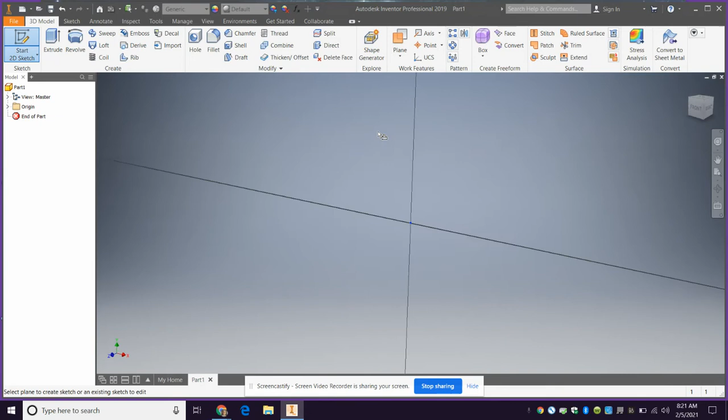All right, let's go. So first thing we want to do is start a sketch. Now, in the instructions, it says the maximum length should be 5 inches. So one of the first things you want to do is set a line that's 5 inches long.

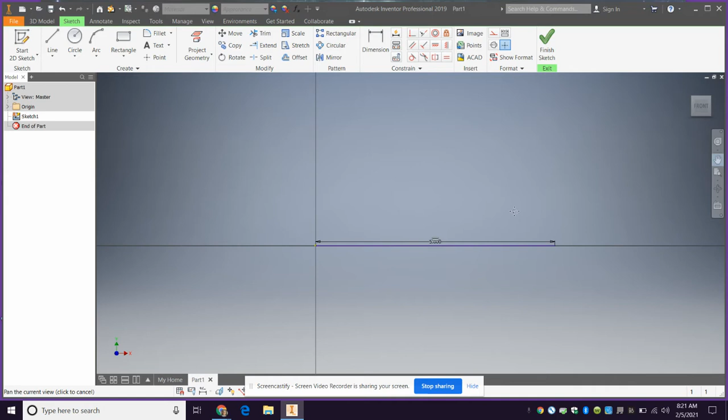All right, now zoom out a bit here so you can see what's going on. You've got to realize that when you do this, it's going to start with a revolve, and when you do it, it's going to end up doubling the thickness. So what we're going to do is sketch half of this lightsaber.

So it comes pretty, something's going on at the end here I can't quite see. Let me see if I can find a better side view. Episode 4, yeah okay, so this is the original one. I think Rey ends up with this one. And future... oh, that's a nice image. Okay, so it is pretty flat in the back.

No, that's Anakin. Can't seem to find a very good view. All right, so it looks like something's going on in the back, I can't quite see it very well. So anyway, I'll just continue with... oh, here we go with this view.

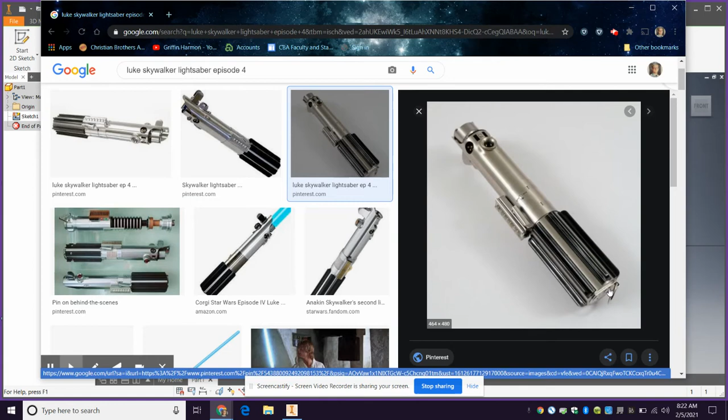Okay, so it's just a little thing to attach. All right, so it looks like it comes pretty straight, steps down a little bit, comes straight. So this is a fairly easy start to this one.

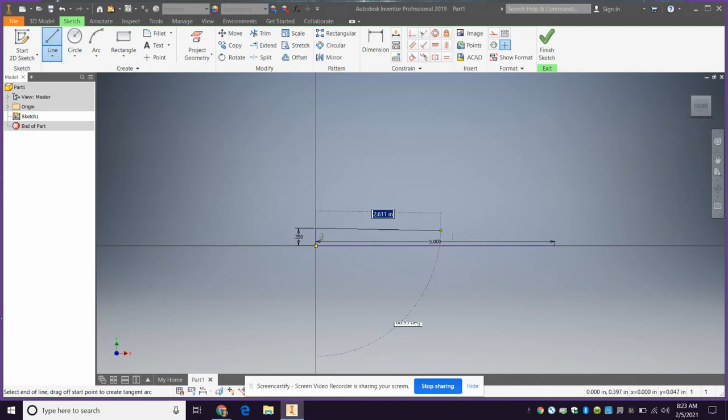So the total width of this thing is going to be maybe 3/4 of an inch. So let's make this 0.35. Comes forward, steps down a tiny bit, then comes to the front.

All right, now the step down, I will say you're going to have to maybe exaggerate some of that stuff a little bit, because if you don't, that difference in thickness won't actually print. So I think that actually looks like something that's just kind of around the middle. But oh well.

So let's go ahead and cut this front part off here. I guess we should shell it first, huh? Or revolve it, I should say. So actually, I want to make the front hollow, right? So let me show you how to do that.

Actually, going to draw, we'll say down to there. All right, let's dimension this. 0.08... 0.05 is probably better. Trim off this and this. Let's delete this dimension really quick, dimension here.

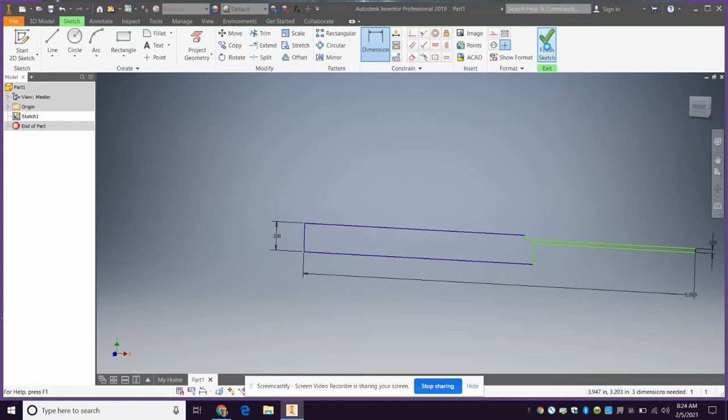All right, I'm going to revolve this. Finish sketch. Revolve this shape about this axis.

All right, okay, so I know that steps down quite a bit more than what it appears to in the actual part, and I don't know that I necessarily have the proportions right. This appears to be just about in the middle of the front edge of this. It actually looks like maybe I should step it down back here a little bit too, so I think I'll do that now as well.

All right, so let's go back to that revolution, the sketch. All right, I'm actually going to make this line step down here a bit as well. Oh, that's not what I want to do. So I'm actually going to change this up a little bit.

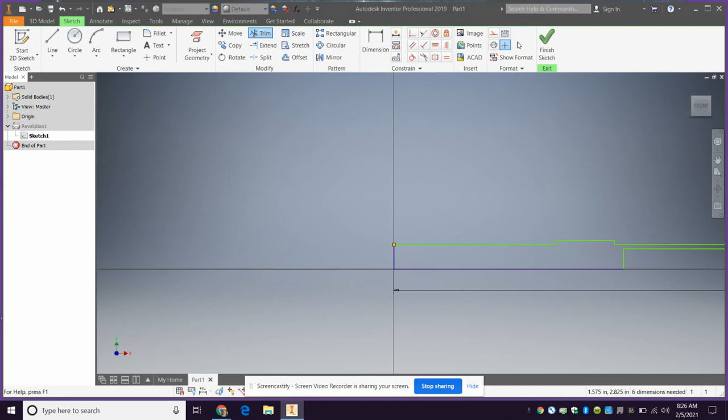And again, I'm just eyeballing the proportion right now. You could get a little more technical and bring the picture into the model and trace it, but this will do for our purposes here.

Sketch. All right, now one important thing you can see, the grip's going to go down here. I got to cut out the front here a bit, so I might have to move back a little bit. We'll see. So this front part, I got to cut this out, then I got to make this thing. That's probably one of the more important things to do right now.

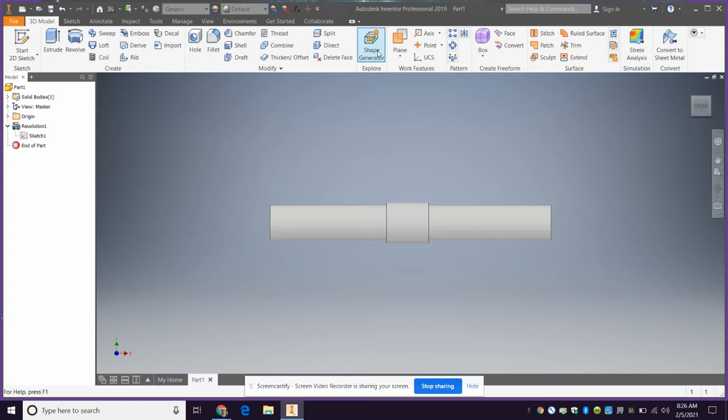So this is the important thing here. We got to make a plane, tangent to surface and parallel to plane. All right, and after I do this, I'll do the grip and then take a break.

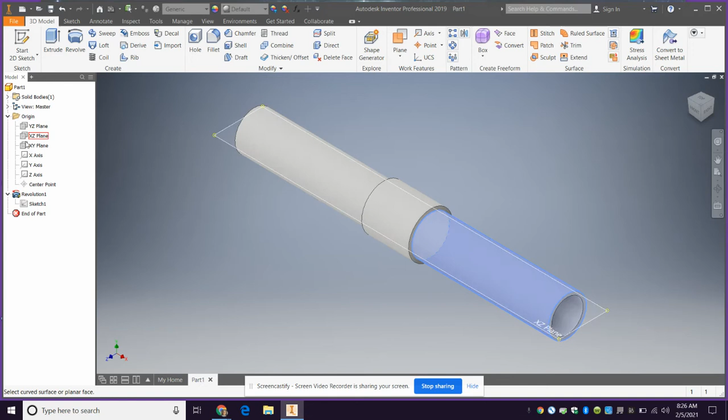So tangent to surface and parallel to plane. So we're going to make it tangent to this surface, and the plane we want to make it parallel to is going to be the plane that cuts right through the middle of the object. So unfortunately, it put it over on this side, which is okay. But see how it's blue? That's a problem. When we go to sketch on it, we want to be on this side to make that little scoop cut. But that's going to be unfortunate.

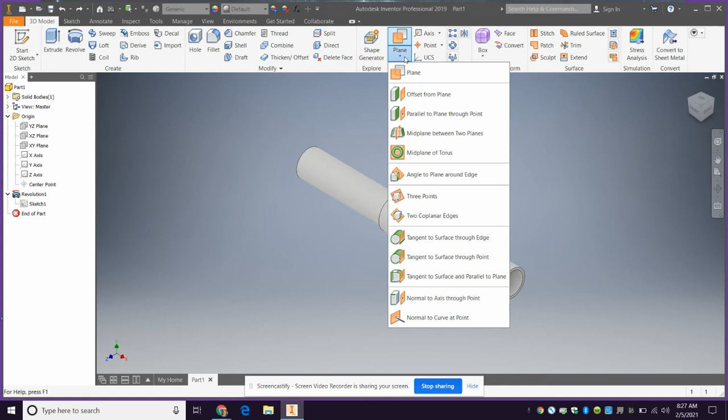Actually, let me try doing that again. Let me change the order I do things. Let's go tangent to surface and parallel to plane. Let's select the plane first, and then I think if I touch this side, it'll put it right there. Yeah, that's what you want to do. Do the plane first, then touch the side once they go on. Now I can start a sketch over here.

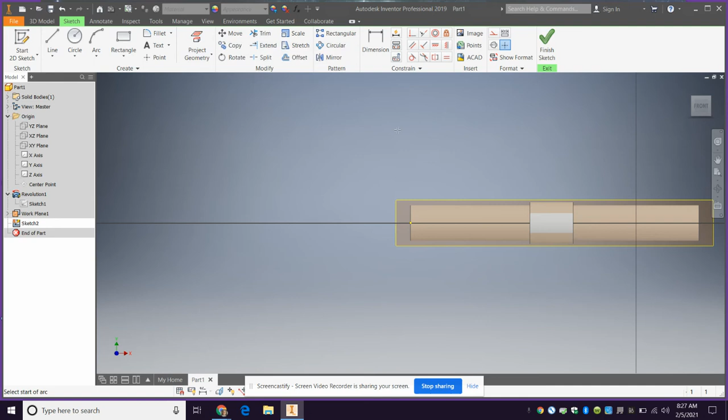All right, and I want to scoop it down here, it looks like, right? So I'm going to start with an arc. Now, I probably want the arc to intersect right on that, right there, right where that was, and somewhere down here. And then we'll do that. Now I think something like that will probably be good, so we just got to connect it up.

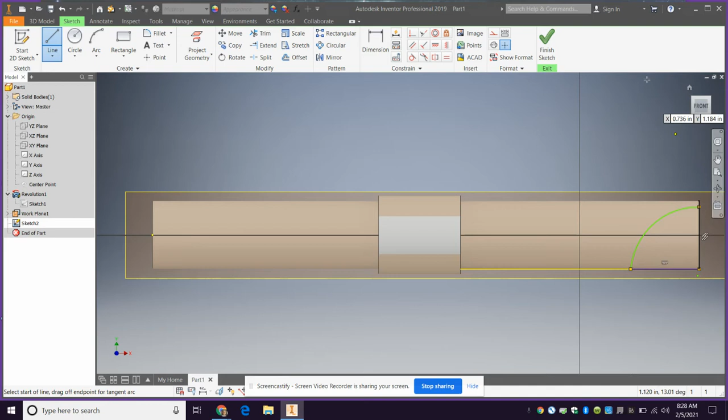All right, finish sketch. And then all you have to do is extrude that shape and make it a cut extrusion, and then hit OK. Now you see what happened there? See, I don't like that. So what I got to do is move that drawing up to the top. I should have recognized that, right?

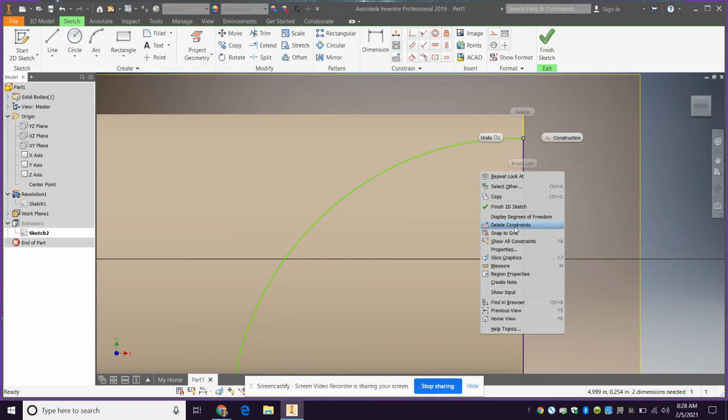This point in the arc should really probably go up there, so I have to delete these constraints, right? If you snap something to a particular area, it's going to want to stay there. So delete constraints, and now it should let me move that point up to there. See how that looks? You know, still kind of weird. I don't love it, that's gonna be too sharp.

All right, so now what? Let's go look at the drawing and see if we can figure out what to do here. So it looks like maybe an arc wasn't the right play, right? It almost looks like I have to make a spline here to make it look more like that. So let's go back to this drawing.

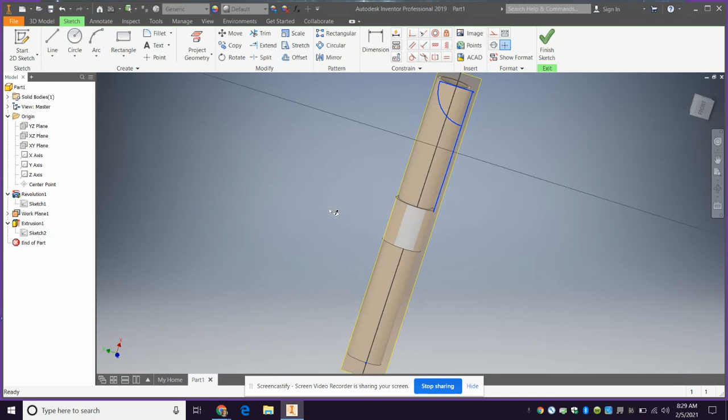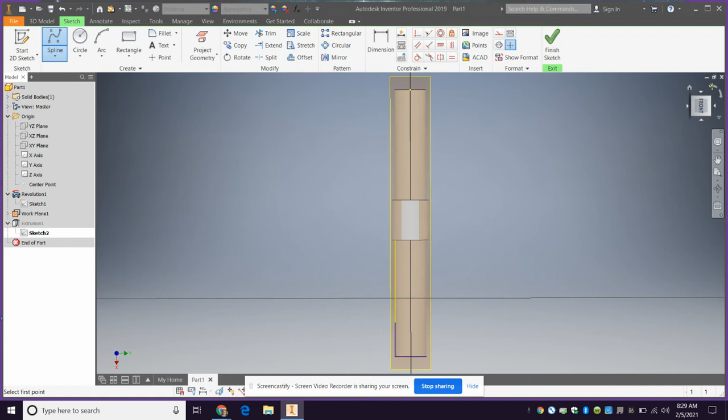All right, it looks to me like it should go more steeper and then kind of curve up a little more slowly up to there. So let's go with spline. I didn't really like the way that looked anyway. All right, so the spline, we'll start here, hold down control...

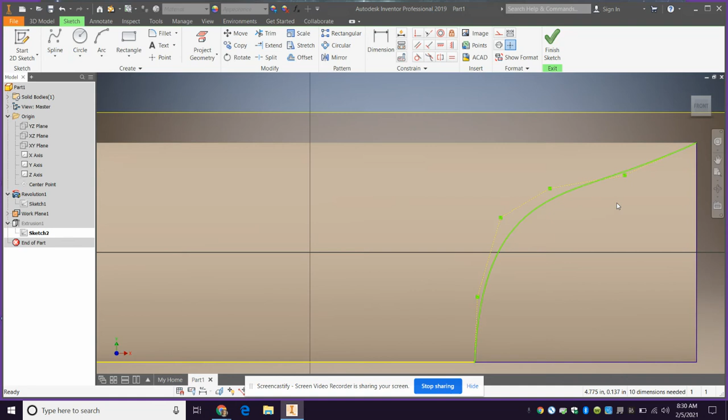And then it kind of came much flatter. All right, and I'm going to adjust it a bit, and move this down a little bit. No. All right.

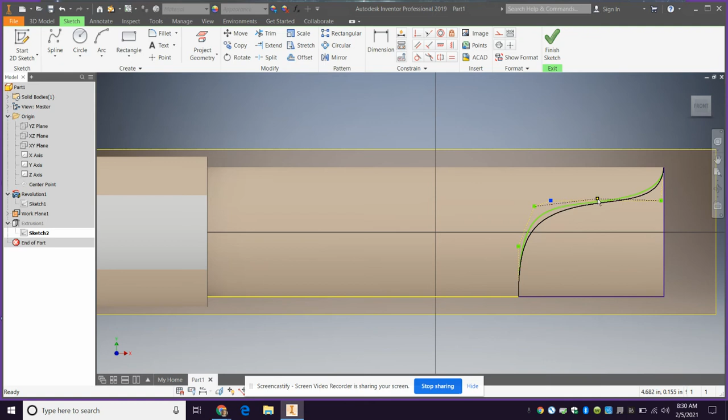I think it almost went kind of flat in the middle. I think I need to move this one over a bit. Yeah, there we go. All right, let's see what that looks like. All right, that looks more like the desired profile. And if it's not perfect, that's okay.

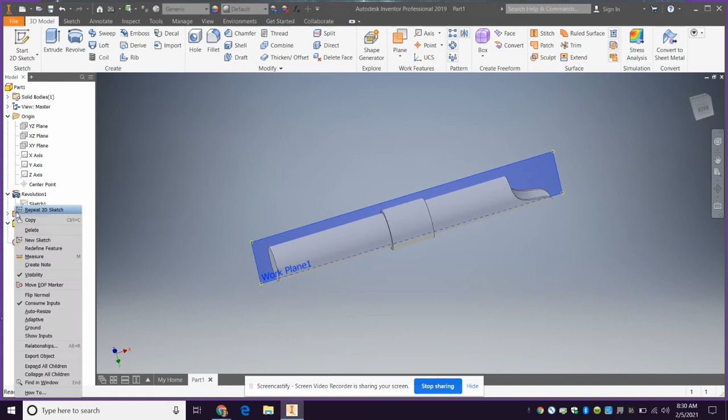All right, so it's coming along. I'm just going to show you the grip now. Okay, so the grip, let's make this plane not visible anymore. Turn off that visibility. All right, the grip, you're going to make on the work plane right down the middle.

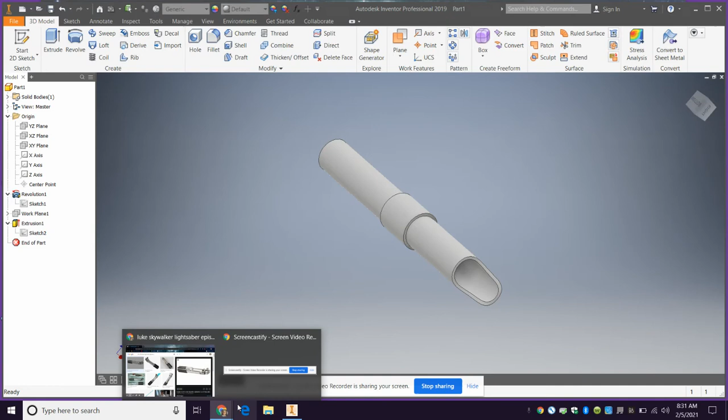Yeah, it's a T shape and extends pretty much to the back, it looks like. Not quite though. So here's what we're gonna do, this will be pretty cool. We're gonna make a work plane, offset from this plane, and move it in a little bit, negative 0.1. See where that puts us. Okay, yeah, we'll start the grip there.

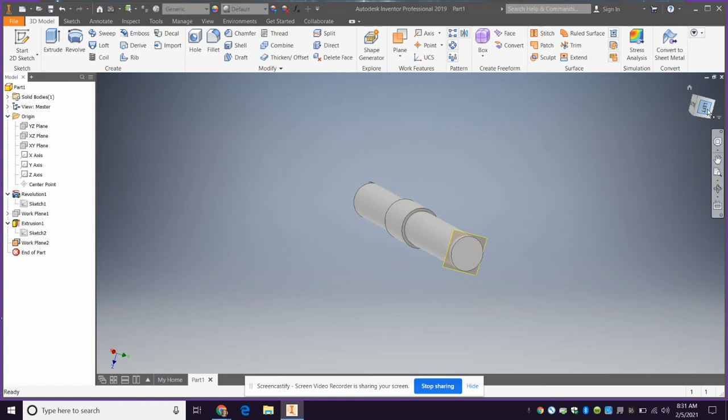All right, now let's get ourselves positioned here. I think this is where I want the one to go, right? All right, so this is kind of like a T shape.

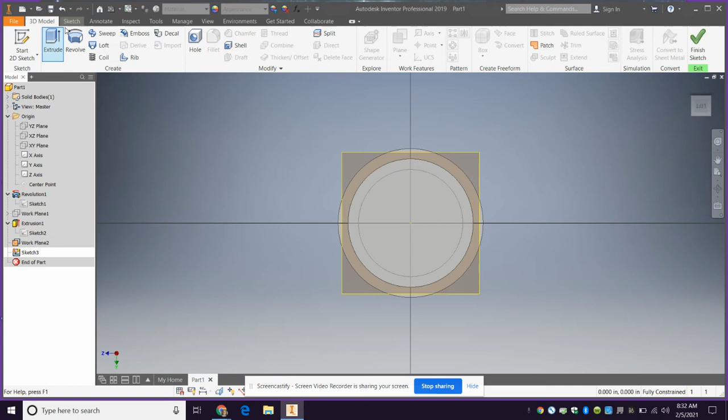So let's start a sketch on this work plane. Now, what I gotta do is change my view. View, visual style, shaded with hidden edges. That way when I start sketching I can see inside. So this is the outer surface. I want to make sure I sketch this T shape right down into that.

Now let's get this going. I'm going to use something called a 2-point center rectangle. Check this out, I'm going to start it right there. What that does is makes a rectangle that's centered at that point, so you don't have to do any weird dimensions.

Now, I will say you probably want this thicker than you think. 0.05 is pretty darn small. If you don't make it big enough, it's not going to show up. So let's make it up to about there.

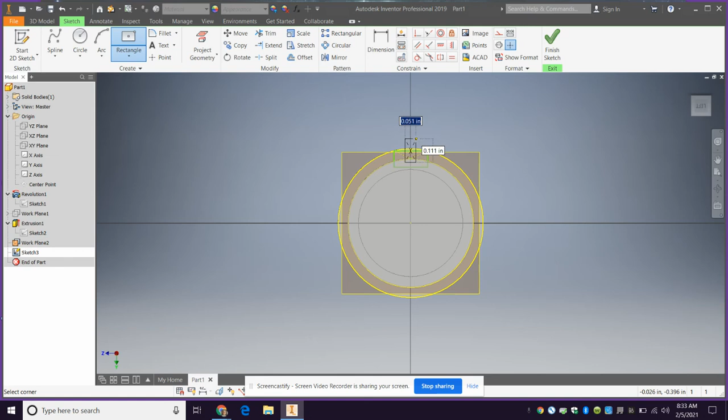Now I'm going to do another center point rectangle there, and let's go with that. So we got trim now, extra stuff out here. You get a lot of extra stuff in the middle from all the construction lines that come with these rectangles.

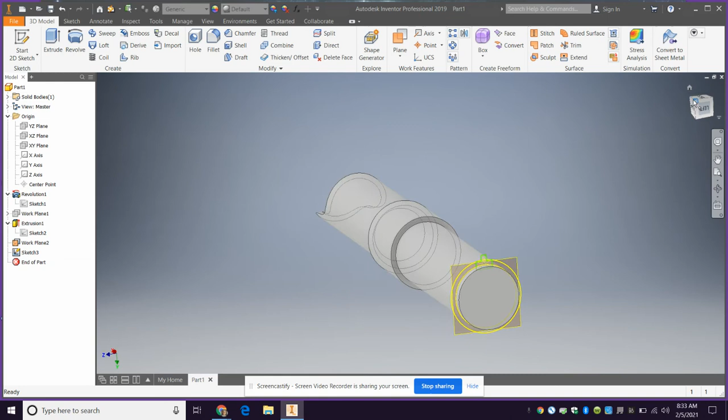All right, finish sketch. Now we're going to extrude that. We're going to send it that way, the other way, that way, and drag it up, not quite all the way up there. That looks good. All right, 1.93, let's just round it down to 1.90. 0.95.

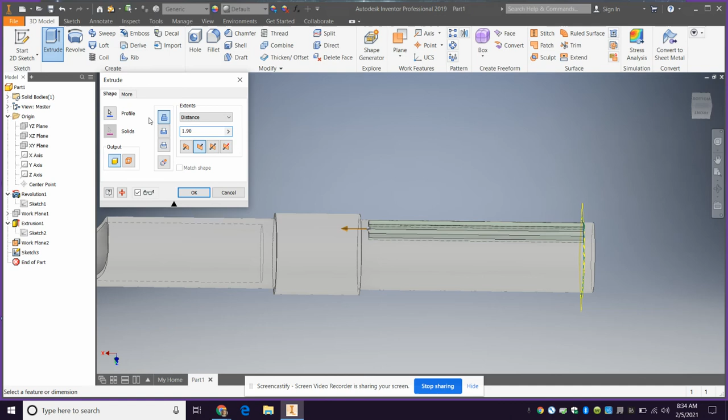0.95, okay. And actually, that work plane, I might move it back a little bit, it's a little far up. So I can double click on that work plane, 0.05. All right, double check that extrusion.

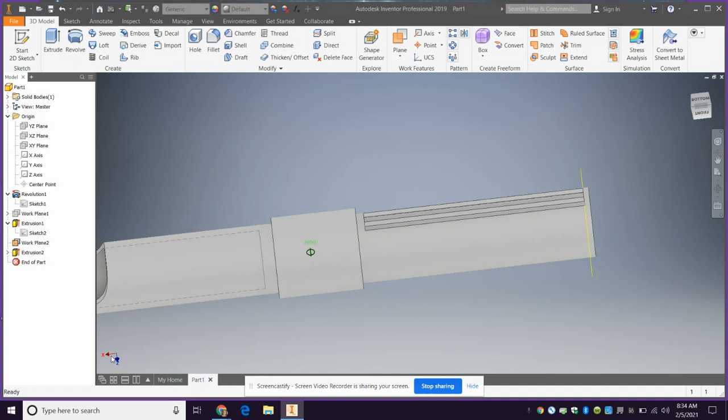Let's go back to that. Let's make that 2.0, nice even numbers here.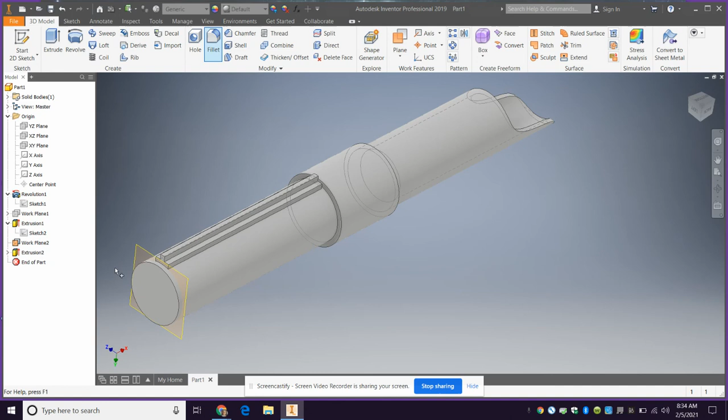Now it kind of looked like that was a little bit rounded on the edges. So what we'll do now, we'll quick fillet those edges just a tiny bit - way too big. Probably gonna have to do like 0.01 or so. I'll put 0.02, that looks reasonable.

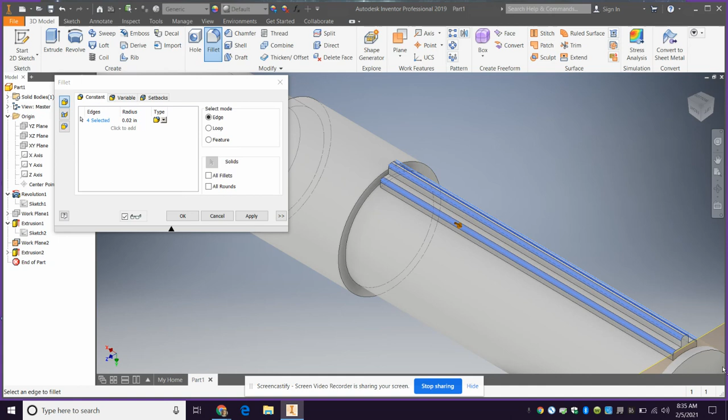All right, and then you can change your view if you want. I could have done it from that view. All right, looks good. I don't think you want to get into filleting all these edges, you probably won't like that.

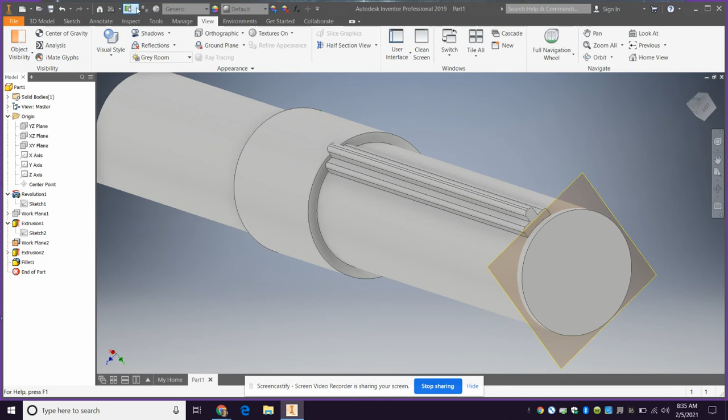Okay, so now I'm going to change my view back to shaded with edges. And now the final thing here for the grip is to circular pattern this. All right, so let's go back to 3D model, circular pattern. The trick here is you got to get the object and select the fillet - you have to select them both, extrusion and the fillet. You could also just select them here. And then the rotational axis is going to be the grip.

6 is too few, let's try 8. I think that's 8 in the image here. Let's see if we can figure out - 1, 2, 3, 4. Yeah, it looks like it must be 8. All right, looks good, hit OK. Bam.

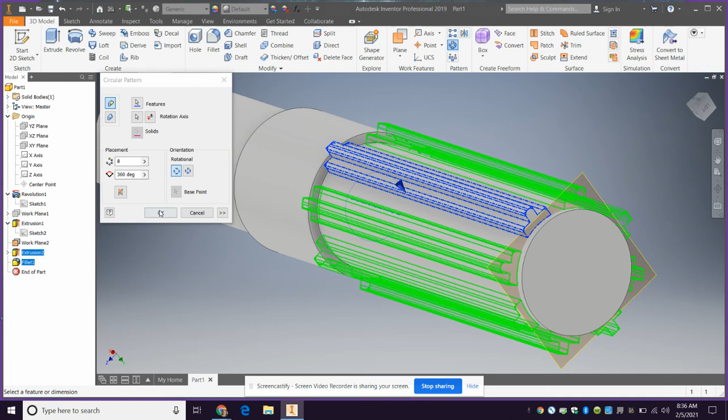There's your grip. So it's coming along, right? Starting to look like that lightsaber approximately. Again, note that those little subtleties and differences in heights - it's better if it's exaggerated in your model a little bit so it shows up better.

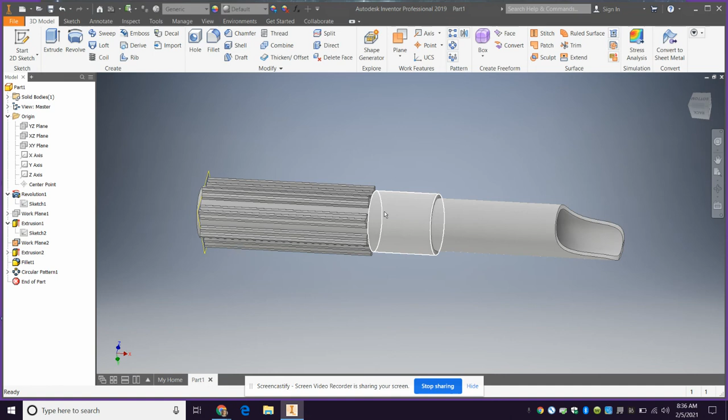All right, I'm gonna pause the video here, and I'll pick it back up with the next couple steps: adding buttons, adding this part in the middle to hold the pen, figure out the attachment.

I want to chamfer this edge. I think that would look good chamfered real quick while I'm still here. Way too big, 0.03, see what that looks like. Yeah, that looks nice.

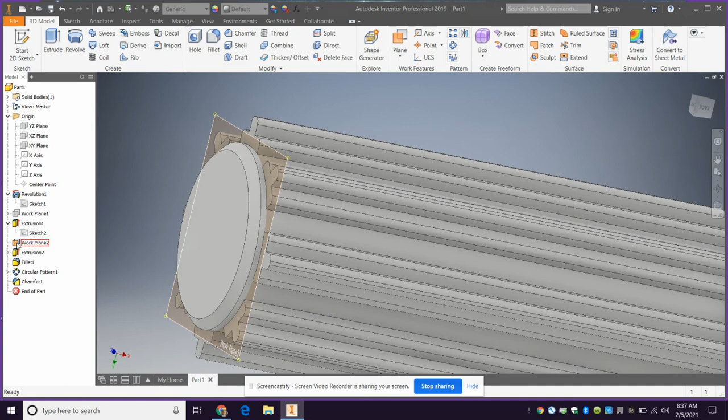All right, make that work plane not visible. And we're looking good, starting to look more like a lightsaber. Very cool. All right, I'm going to save it here. Talk to you later.